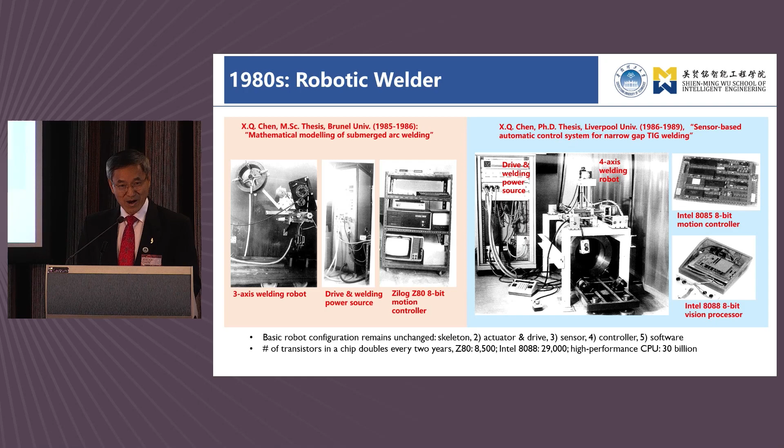The robotics development benefited from the phenomenal growth of computing power. So the chip I used, Intel 8088, had 29,000 transistors. Nowadays, a high-performance CPU chip has 30 billion — that is 1 million times the chip I used.

So in the 1990s, my team developed a smart robotic system for remanufacturing of aero engine components. As I flew into Wellington yesterday, many aero engine parts are repaired after certain flight times. So I was working on robotic machines which can repair, remanufacture those parts to keep our flights safe. That is not easy because we're dealing with parts of individual characteristics, individual profiles.

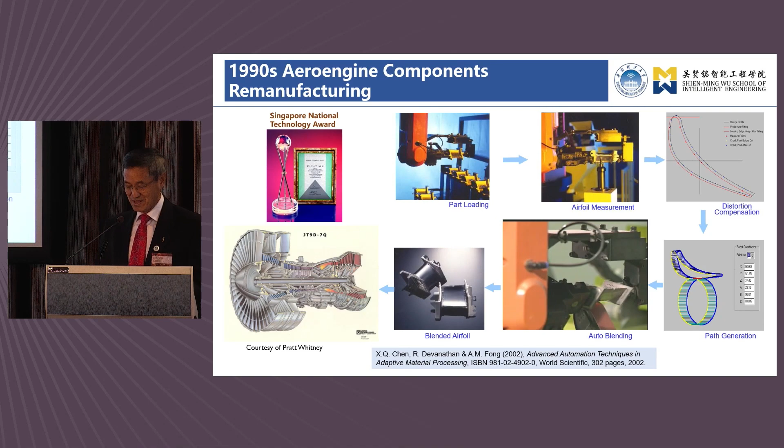But anyway, we have managed to crack 2 major problems. One is to detect and reconstruct deformed profiles, so the machines can be adaptive to parts of individual characteristics. Another thing is to use force, like a human being doing grinding or handiwork, to control the material removal, to make sure the finished profile is within micrometers tolerance.

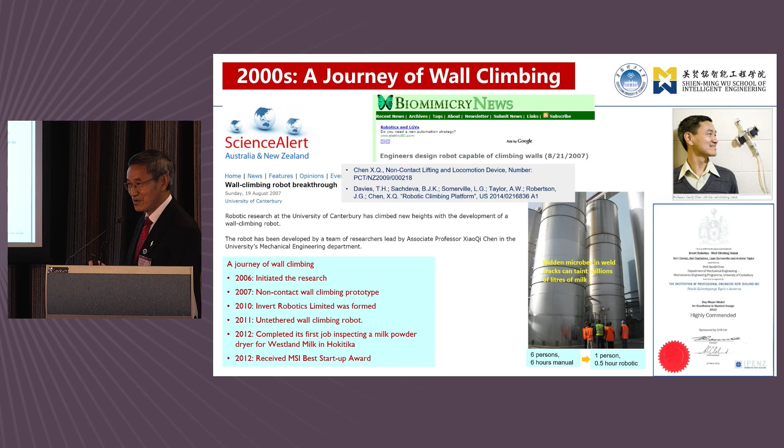So this is the fun part I did at the University of Canterbury. In the 2000s, I was presented with this challenge: to automate inspection of large stainless steel tanks. Why do we need to do that? It has to be done periodically to identify any defects where bacteria may grow and affect food safety. So we were given this challenge to automate a task of 6 persons, 6 hours, to 1 person, half an hour of machine time.

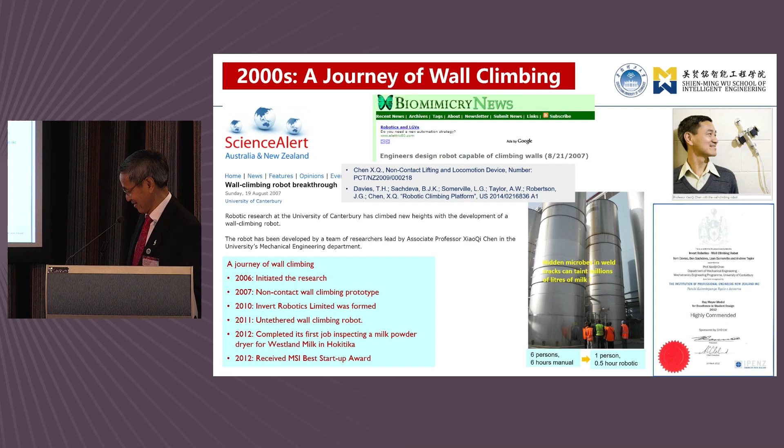So a lot of science going on. My first idea was to develop non-contact adhesion mechanisms, which is great, so the machines can work literally on any wall surface of any condition — rough, gaps, bumps, or any materials, wood, concrete, even wooden doors with gaps — the machine has no problem crossing.

And remarkably, it can carry weight twice its self-weight. I hope I have that capacity, but anyway. So that machine is wonderful, but it has one big problem: it must be tethered for the flow of compressed air.

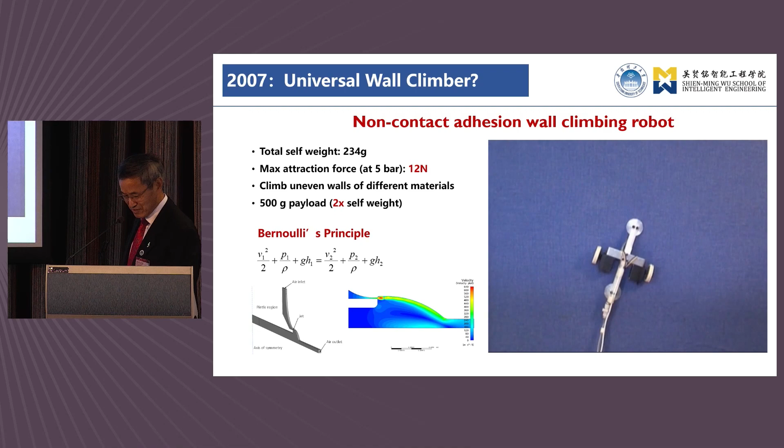That tethered pipe is additional weight, which the machine doesn't like. And also, when the airflow goes to high capacity, the pipe just gets stiffened, which is not good for the mobility of the robot. So that challenge threw us back to the drawing board. We had to start with new things, and new ways for the machine to climb on the wall. So we started on the untethered wall-climbing robot.

And we made a breakthrough in 2 things. The first thing is motorized priming to achieve adhesion efficiency, that means get more payload for small machines. The second thing we did is to mimic human beings for climbing poles and trees.

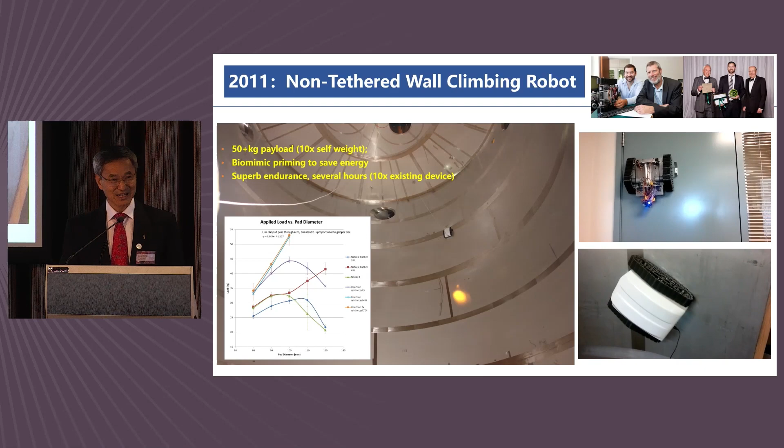We detect the adhesion force, make sure it just has enough force to cling to the wall to conserve energy. That way, the machines run hours instead of minutes. This breakthrough opens up a wide range of applications. Intelligent robotics benefits the advancement of computing, sensing, and so on.

In recent decades, there has been an explosion of developments of intelligent robots. You see robots in entertainment, robot girlfriends if you don't like our human companion, AlphaGo defeating the Go World Championship, humanoid robots, biologically inspired robots, etc. I supervise PhD students working on pneumatic artificial muscle-driven lower limbs for users.

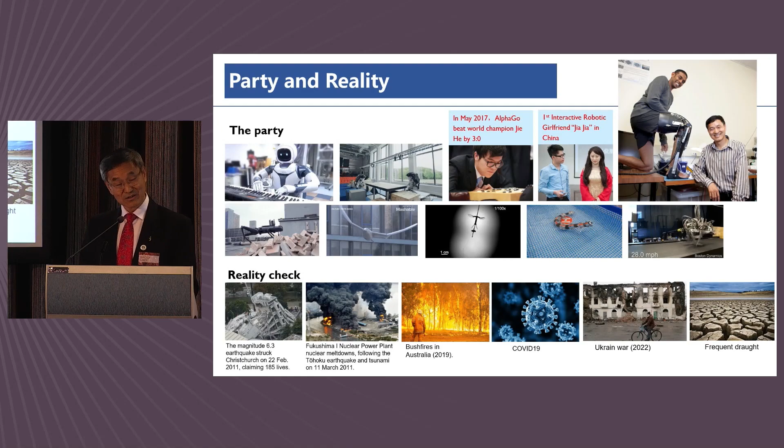But the world faces a grim reality: natural disasters, pandemics, and wars. I experienced an earthquake in Christchurch, first time in my life. When I went to Melbourne four years ago, there was a big bushfire. So we have to ask ourselves what AI and those intelligent machines can do to help us solve fundamental issues that the world is facing.

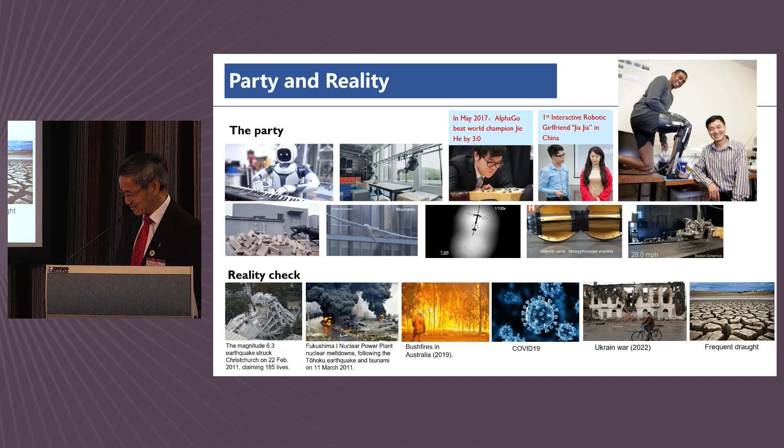According to the report by the International Federation of Robotics, in 2021 China had 268,000 robot installations, surpassing the rest of the world combined at 249,000. The global average manufacturing robot density, defined as the number of robots per 10,000 manufacturing employees, is 141. The robot density in China is 322, and in the United States is 274. I think soon we will see the rise of manufacturing powerhouses: India, China, of course, and possibly Vietnam.

This change will affect the dynamics of geopolitics. Do we have a collective wisdom to manage these dynamics?

There's another challenge: demographic. The population is projected to increase from 8 billion now to 9 billion in the middle of the century, split between 10% in the developed world and 90% in the developing world. So what are we going to do with this population increase? How can AI and robotics technologies benefit the whole world?

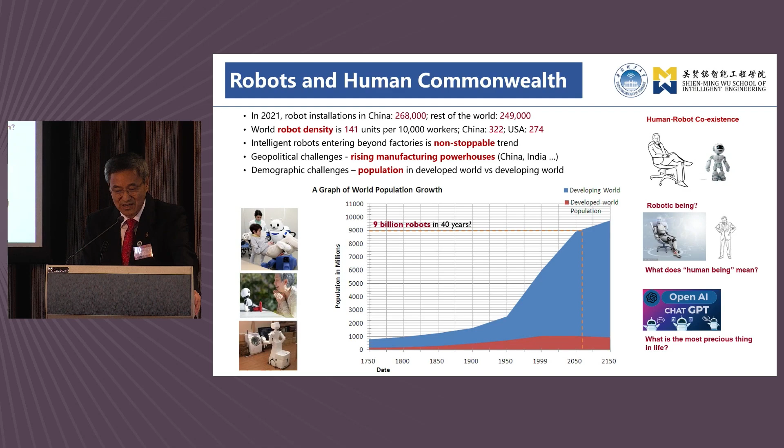Fellows, colleagues, the tide of AI-powered robots turns higher and higher. In riding the wave, we need to guard our hearts. AI and intelligent robotics cannot be allowed to undermine the very meaning of being human. We ought to responsibly advance intelligent robotics for a better commonwealth of humankind.

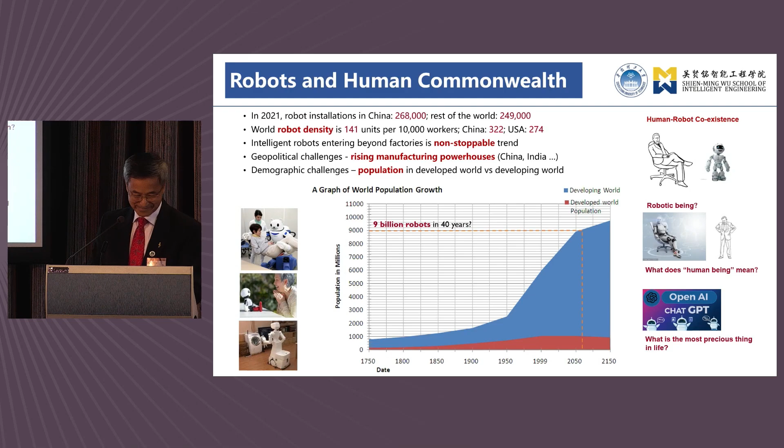Yes, Mark? There's been calls from various computer people that we should take a pause on AI and its development, that it's moving too quickly. Is that something you would agree with?

I cannot entirely agree whether we should pause the development of AI or robotics. I think we just need to responsibly advance the technology. So now you perhaps hear, robotics ethics. I think the international community has to pay attention to AI and robotics ethics. I know among us there are people in philosophy, social science. These are the issues that have to be addressed across the entire communities.